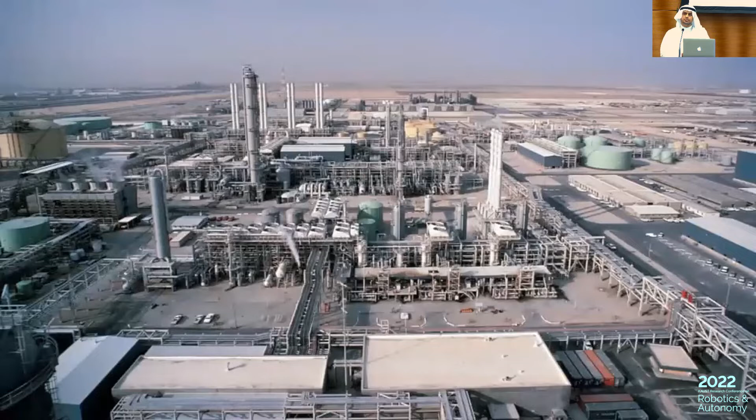If you look at petrochemical plants, you understand how complex preventive maintenance and asset management could be. For example, solar panels - thousands of them - in order to detect on a daily basis which cells are not working, if you want to put a crew that goes around, you understand how complex that is.

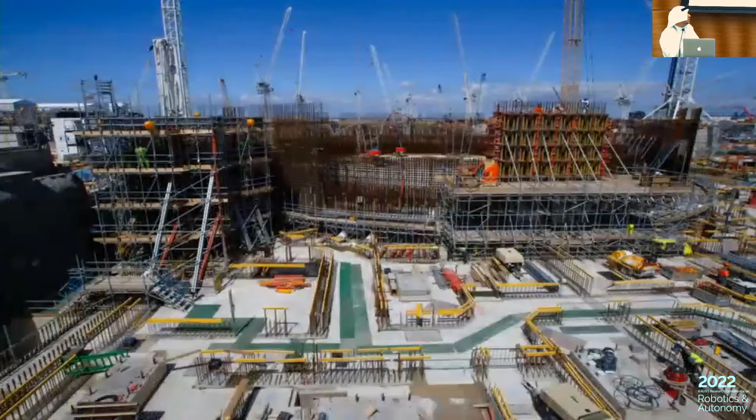Nowadays, agriculture is moving to precision agriculture. With traditional methods, that will be quite difficult. Finally, in any construction site, there are so many moving parts - understanding progress, near misses, and safety. This could be very difficult.

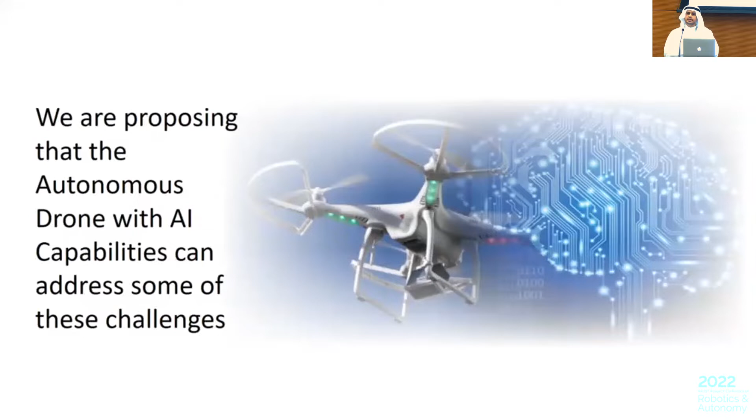Now, I cannot claim that autonomous drones will solve all of these problems. Obviously, it will not. However, it will definitely reduce it. We think that combining autonomous drones with AI technologies and capabilities might be able to address some of these challenges, and most of it.

Now let's take a high-level definition. Very simply: it's the ability of a drone to fly autonomously without a pilot or operator's control, following a mission and/or an objective planning. So what do we mean by that? Let's take an example.

When you have mission planning, you set for the drone specific waypoints. So the drone actually flies from A to B to C and back to A.

In mission planning, for example, this is an example of security surveillance - you have security centers looking at a specific area, whether headquarters or campus. Somebody at the control room will always be available as a pilot or operator, always looking at the camera and what is going on while the drone is actually flying from point A to point B.

That's what we call mission planning. You still have somebody in the back looking at the drone, still looking at the actual monitors and being able to identify some of the behaviors going on in terms of security.

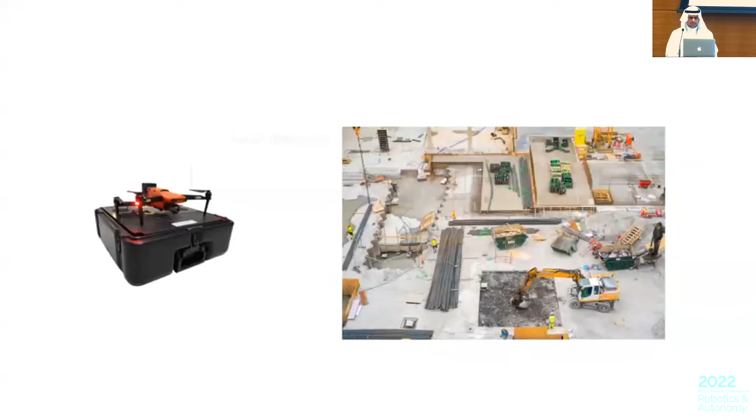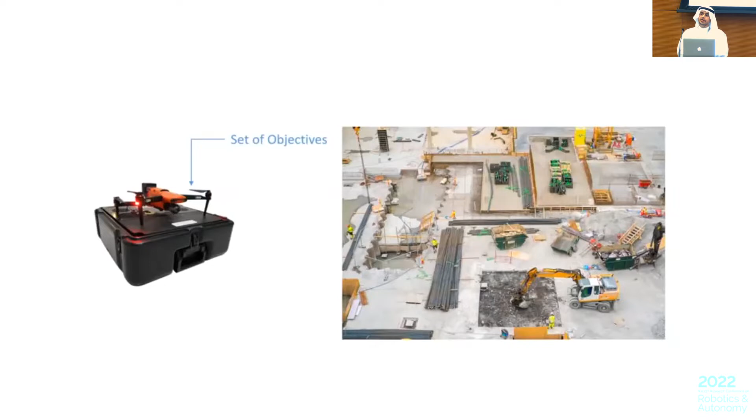What you do to reach objective planning is set an objective. You tell the drone, I want you to look at a specific area and tell me the progress happening there. You also set an objective to identify specific assets, like vehicles and heavy vehicles on the ground. You want to count, for example, how many vehicles are coming in and out. You tell the drone - you put that all into the intelligence of the drone.

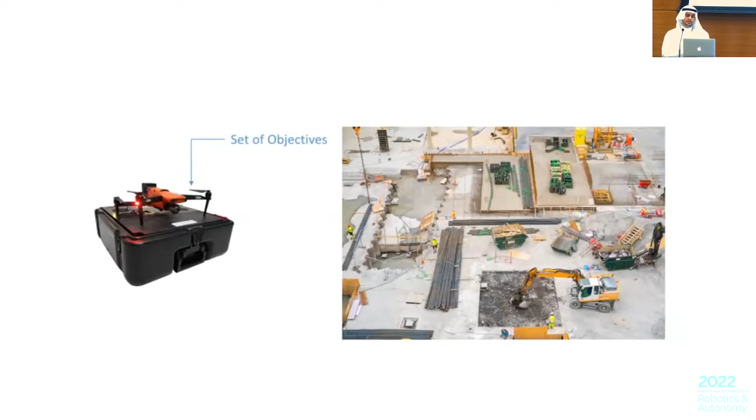You also set specific geometric boundaries. Now you're not giving the drone waypoints - you're actually almost geofencing, telling the drone it can only fly within these particular geometric boundaries.

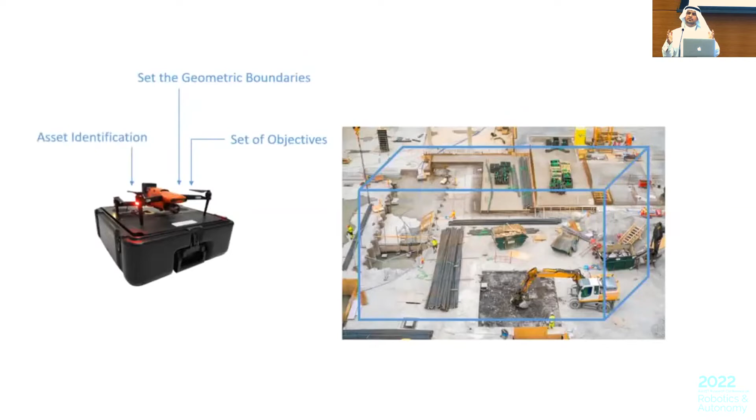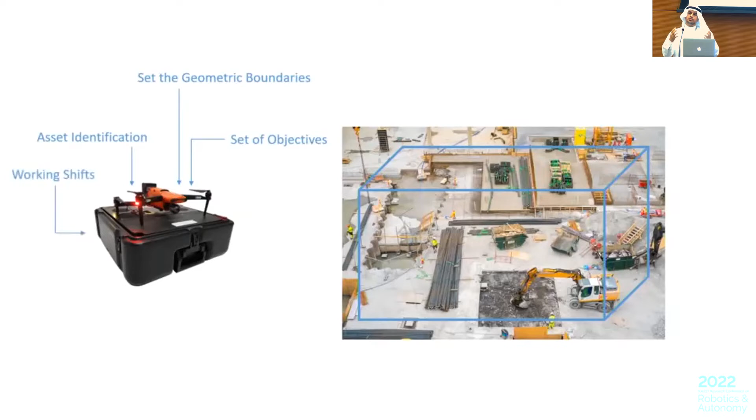And then you also identify to the drone all the assets available at that particular site - all the machineries, vehicles, and equipment. Then you tell the drone the work shift that's available, and very importantly, the actual schedule. In construction, you have this master schedule - when area A will finish, when area C will finish, and so on.

Then basically the drone will plan its own mission. In a typical drone-in-a-box technology, when that information is available to the drone, you don't have to tell it when to fly or when not to fly - the drone will plan its mission. It's now clear for the drone where the boundaries are, what geometric boundaries it's going to fly within.

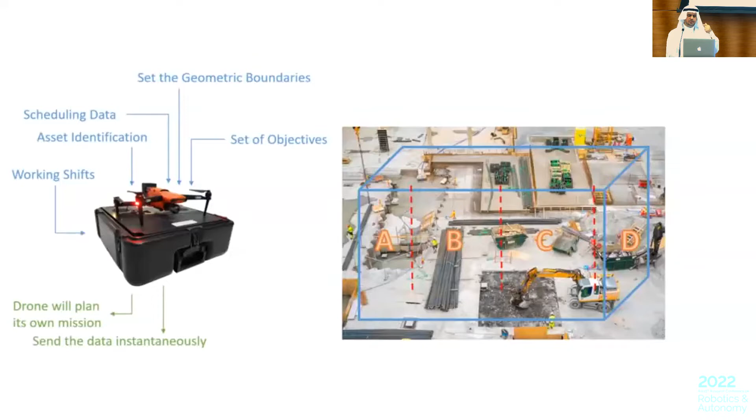And it's going to send data instantaneously, processing data on board right away. So as soon as it finds something, it will tell and send that data. For example, if one objective is to know how much progress we have in construction site C, the drone will be able to send that data immediately.

Fail-safe and energy control - let's say the drone, for whatever reason, is running out of energy or there's a problem. It will go back to its box, recharge itself, and continue the flights.

And the most important - anomalous detections. Things you haven't put in there, you wouldn't know about, but the drone will still fly and notice. Let's say you're monitoring the number of vehicles coming in - if a specific heavy vehicle comes into the site, the drone, not knowing exactly what it is, should at least be able to notice it's not in my database. What is this? At least it will send that back.

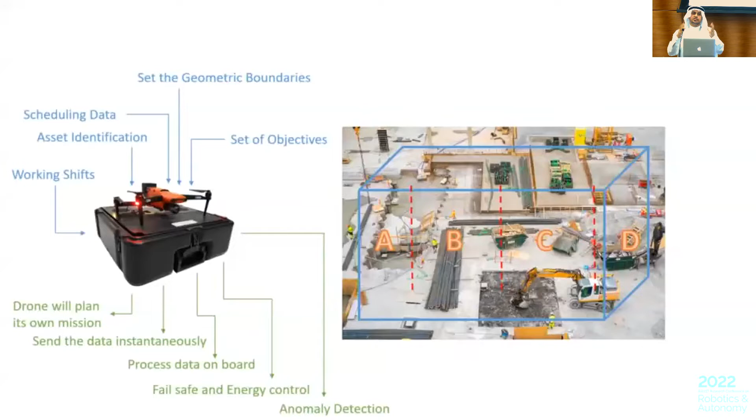This becomes extremely useful. For example, if there's smoke or fire, or anything abnormal, the drone should be able to send that information back.

Now I'll make this very fast - this is just the difference between autonomous and automated. A lot of you probably know autonomous involves a lot of adaptation happening - a lot of the intelligence as the drone is flying is actually adapting and giving more information, increasing its database. However, with automated, well-defined parameters apply - there are very restricted areas and predefined areas you want to fly.

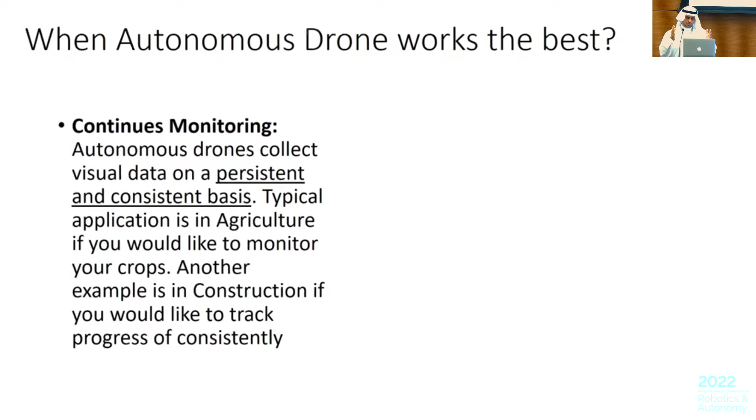Now let's answer a very important question - when do autonomous drones work best? I think there are multiple areas, but let's focus on three of them. When do you need continuous monitoring? When there's a persistent and consistent basis where you'd like to monitor things over and over and over, this technology becomes very, very useful.

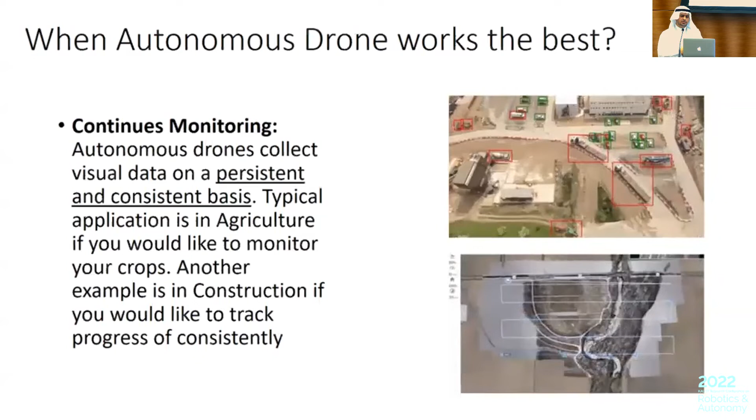Going back to construction sites, you want to go back again over and over rather than having a pilot flying this every time - you will set your drones and they will go out and do the flying. Same thing applies to precision agriculture - that could be a good example.

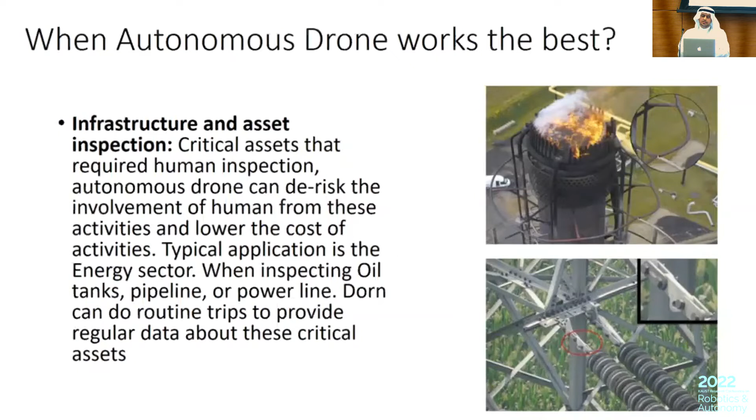Another example is when there are infrastructure and asset inspections. You will definitely de-risk a lot of the problems and challenges you have with putting a human there. For example, on my right, that's a flare from oil and gas - imagine if you have to shut down the flare and put somebody up there just to check the iron bar. The drone can actually fly autonomously, look at the flare, take a nice inspection point for it, and come back. So you're de-risking the involvement of humans in something like that.

And again, the last thing - not least - there are a lot of other benefits. However, detecting any abnormalities - let's say, for example, with AI and machine vision, autonomous drones can be trained to detect abnormalities.

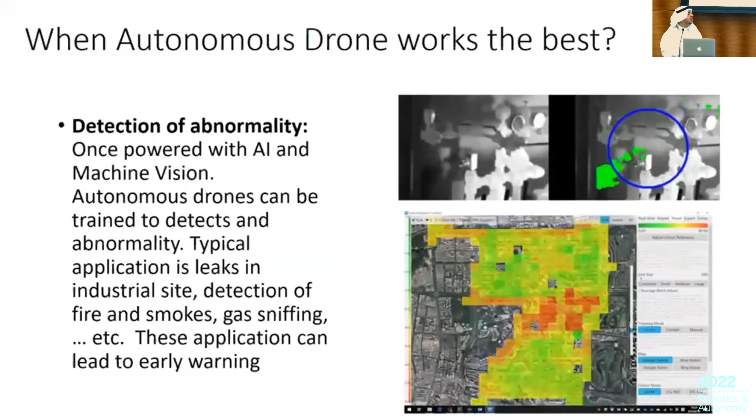A typical application is leaks that happen in gases. There are actually beautiful payloads that can sniff gases, and on an autonomous basis you can fly the drone in a specific area and tell it to cover that area and tell you what gases are present - it will immediately identify those gases for you.

Now let's talk a little bit about technology. So I spoke about some of the challenges, the differences between mission planning and objective planning, and some of the applications. Let's talk about some of the technologies - very obvious technologies, the types of drones.

In autonomous drones, there are fixed wings, multi-rotors, and hybrids as well. Each one has its own applications. For example, fixed wings could be extremely useful when you want to cover a bigger area - let's say a pipeline, you want to send the drone down and have it inspect the pipeline. However, multi-rotors could be very nice in a very concise area.

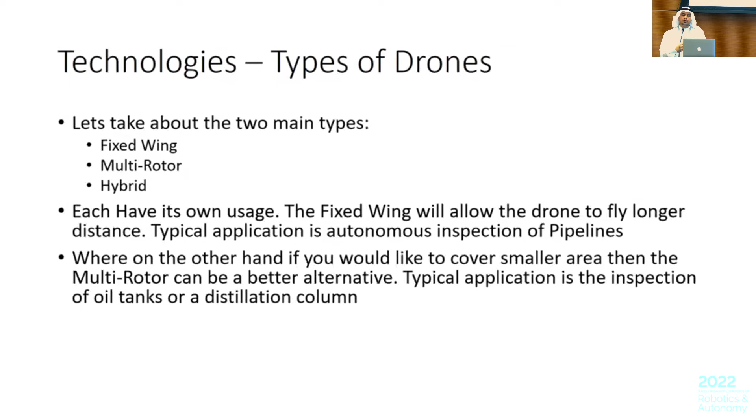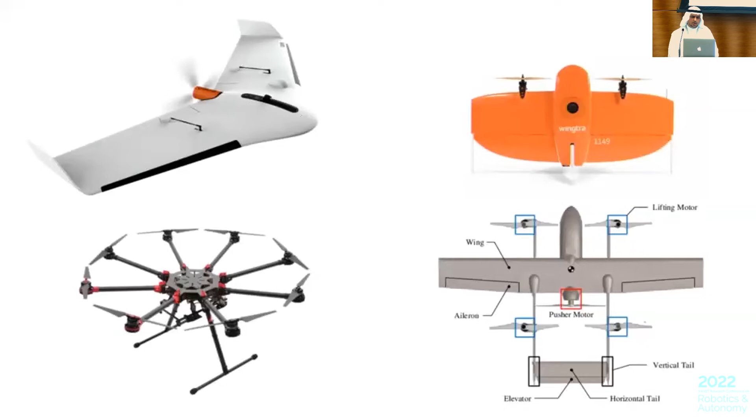Again, communications, and I think X-Wing did talk about that. When you want to fly autonomously and go a little bit beyond visual line of sight, Wi-Fi and radio communication might not be enough for you to get all your data back. There are technologies available like LTE or 5G networks, and of course SATCOM. I have seen drones with satellite communications on them, and these technologies are already being used in drones.

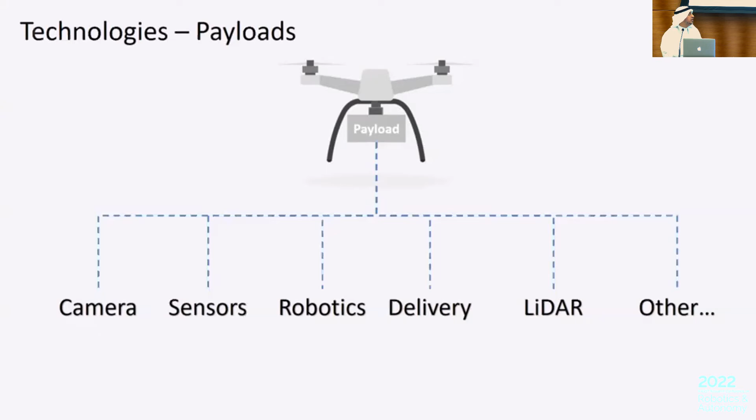Payloads. Now, payloads, honestly speaking, without a payload a drone is a toy. Payloads are what actually empowered drones and made them very useful. There are lots of payloads depending on what you want to put, and then you can actually use that for your autonomous mission.

You have to be very careful with payload, especially when you want to fly your drone autonomously and want it to go as far as possible. The heavier the payload, the shorter the flight, obviously, because you're going to consume more energy.

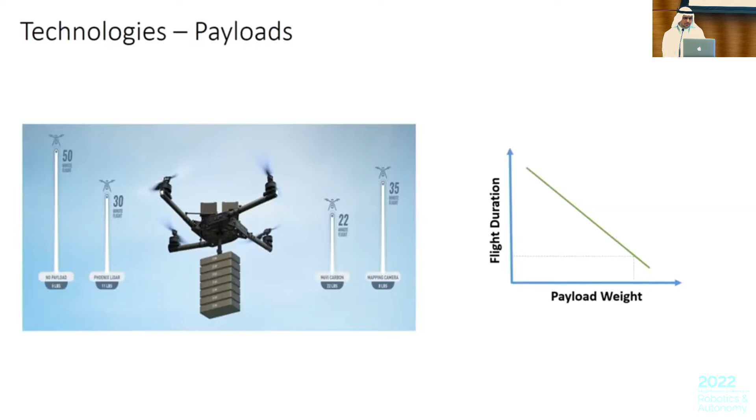Software and system integrations, obviously AI and machine learning. AI-based drones rely largely on computer vision. There's so much advancement happening in that area. I think AI will become a very important technology that drones will be using in the future, being able to identify things as it goes.

Mission planning software is becoming more and more robust, moving away from just mission planning into objective planning.

There are other enablers. For example, we just talked about GPS. RTK technologies are available for GPS correction. Let's say you want to navigate through bridges and want to be extremely precise, to a centimeter — you'd want to use technologies like real-time kinematics.

UTM, I think, is extremely important — being able to have unmanned traffic management for drones in a specific area, a city, or even a concise area. So if there are multiple unmanned systems flying, you should be able to do appropriate traffic management for those. These are all enabling technologies.